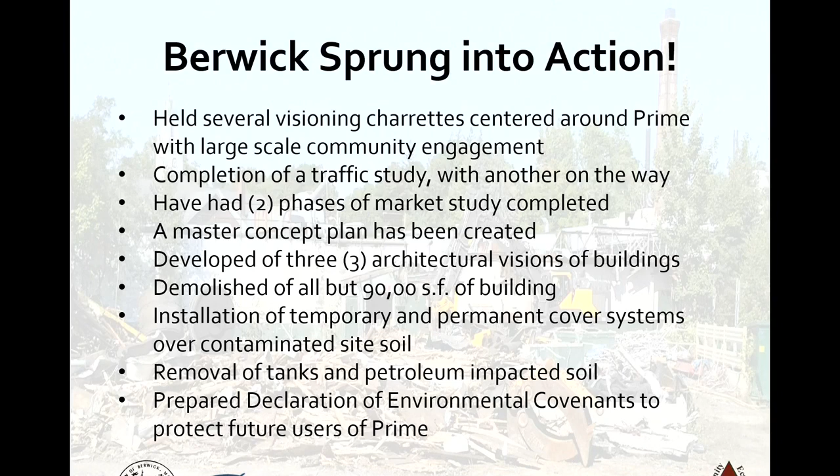In Berwick, we've held several visioning sessions and had large-scale community engagement. We've completed a traffic study, and we've got another traffic study underway where we're looking at every intersection downtown, and how we can get bike lanes in there and improve pedestrian traffic, but also have it all work together with the cars. We've also had a market study done.

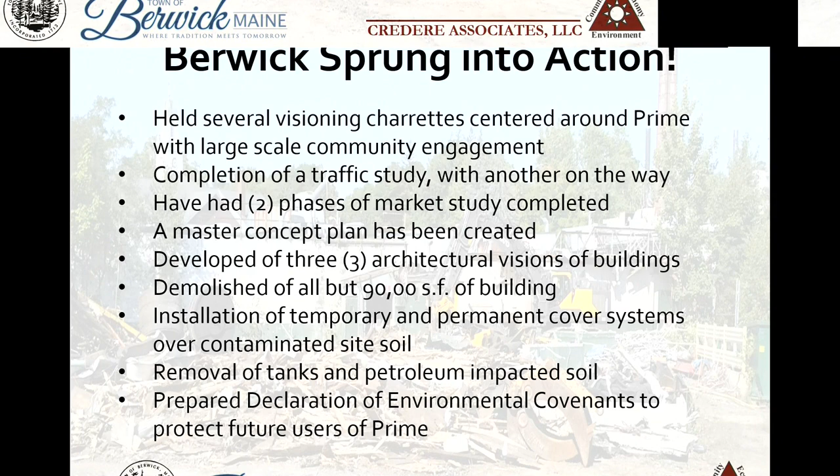You'll see that there's a master concept that's been created, with architectural renderings of the buildings. All but 90,000 square feet of buildings have been demolished, about 7 acres of contiguous buildings that at one point was 47 buildings put together. Yeah, and we are on our way.

We'll just give a little background. Samantha is going to run us through a lot of the update on the cleanup that's been executed over the last several years. But I think James hit the nail on the head, that there's so much incredible momentum going on in Berwick, and a lot of it ties back to, first and foremost, the hard work of a number of volunteers in town. James recognized a lot of them, but there's a lot that still should be named too, because day in and day out, meeting in and meeting out, they've shown up and been part of the momentum, been part of what's going on. And you can tie a lot of the interest in developing our downtown to this important 11 acres across the street, of which we're about to update you on, about 8 of which will transfer to the future developer, the Funds of Jupiter or 20 Sullivan Street, whatever he wants to call himself.

This will transfer, and this will hopefully be the next step in the journey for this property, which leads to economic development. I live in Berwick, so I'm a Berwick community member. I'm also the chair of the Ad Hoc Recreation Committee, and I'm on Envision Berwick. I work at Credere Associates, and we did a lot of work on this. Previous to working for Credere Associates, I worked for Weston and Sampson, and we did the demolition design to help Credere Associates with the demo on this property. At Credere, with all the efforts of Rip Patton to try to help find leveraged funds and do grant writing, all this work has been tremendous. And then we have people at Credere like Sam who have been the heart and soul of what's been going on, the people that tirelessly go out and just execute the project.

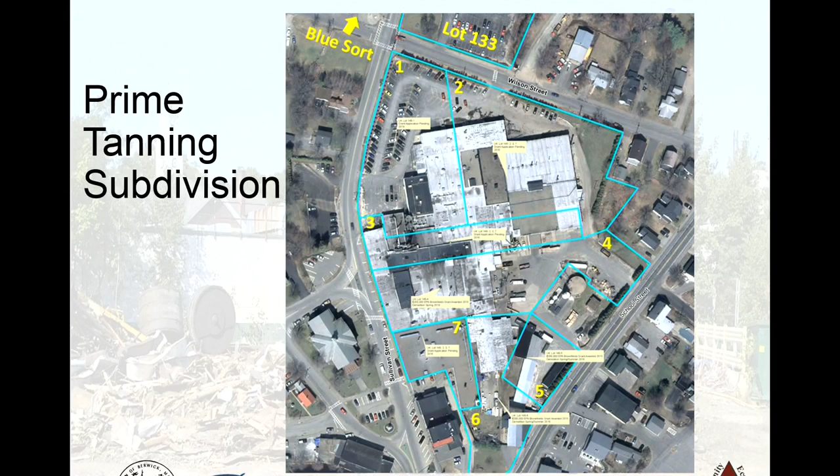All right, so this is an aerial view of Prime Tanning. The lot was subdivided into 7 different lots, and you can see the town hall. Is this a laser pointer here? No? I'll be your pointer then. Okay, thank you, my arm cannot reach.

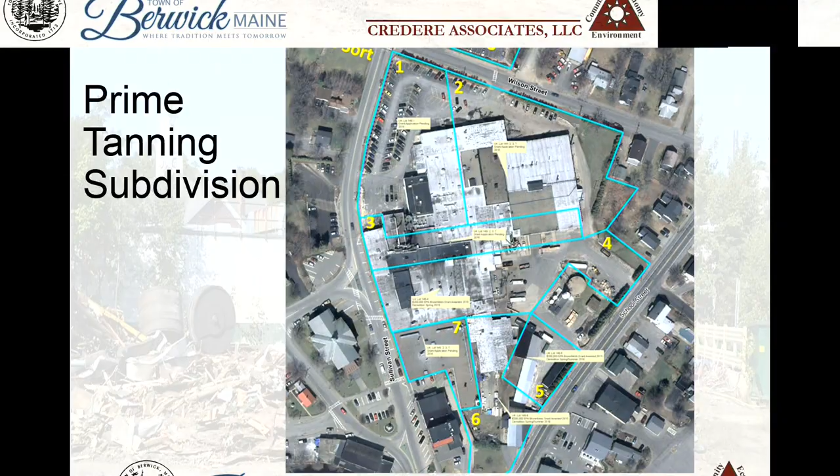So just to give you an idea of where we are, the town hall is right over there where Rick's pointing. And so the pre-treatment plant was also included in the first phase of our work, which is located on the other side. Thank you, Rick.

So it's important to note that this was completed in 2 phases. The first phase was lots 4, 5, and 6, and then the second phase was lots 1, 2, 3, and 7. And we're in the works for the blue sort lot, which is just off the map, and lot 133. Rick's going to talk to you about that later on. So based on how we obtained funding and whatnot is why we addressed lots 4, 5, and 6 initially, and then moved on to lots 1, 2, 3, and 7.

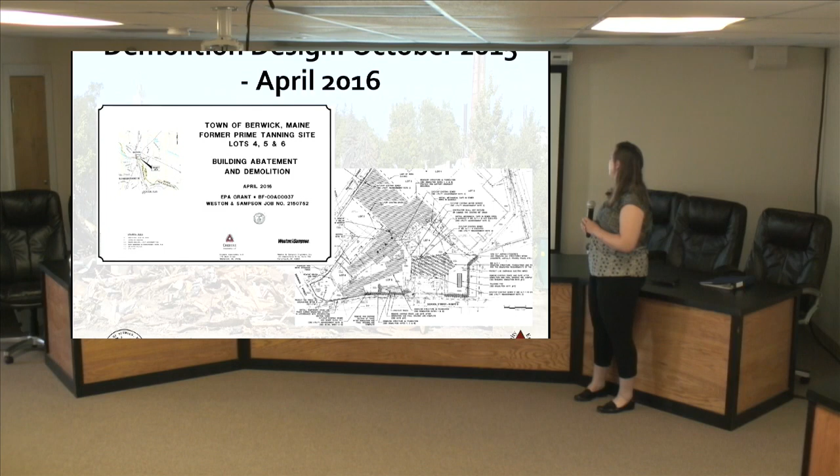The demolition design, which Weston and Sampson helped with, spanned from October 2015 to April 2016. Weston and Sampson prepared the bid specs as well. We also got great input from Frank Underwood of Envision Berwick, who mentioned keeping some of the sewer infrastructure for future redevelopment.

After we finished with the demolition design, we moved on to demolishing the buildings. For lots 4, 5, and 6, all of the buildings were demolished, and for lots 1, 2, 3, and 7, only select buildings were demolished.

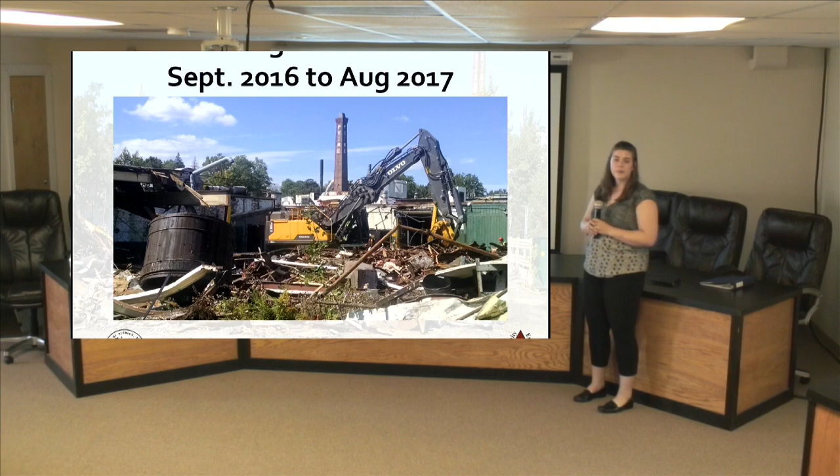This picture is of the beginning stages. You can see the color wheel in the corner there. The town has kept 2 of those larger color wheels, and there are 5 more smaller ones located in one of the buildings currently on the site. The color wheels represent the craftsmanship of the prime tanning operations. They were constructed at the site, so the town felt it was important to preserve some of those.

They're really cool. You look in them and they're all these exotic woods, and they are really pieces of art. The long-term dyeing on the inside has really colored them very interestingly. To incorporate them into some future element of the redevelopment, I think we've already got people who have come through and talked about that. So trying to not forget the past.

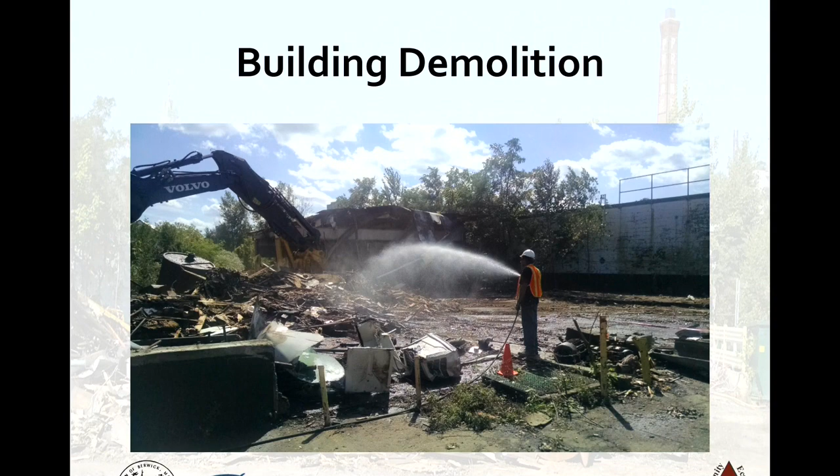This is another picture of the demolition activities. It was really important that EnviroVantage prevent dust from migrating off of the site. So there was constantly a person keeping the demolition debris wet while they were doing their activities, so there was minimal dust. I think we had zero complaints, right, James and Steve? No complaints on the dust, which was really good. For a big project, that's pretty good.

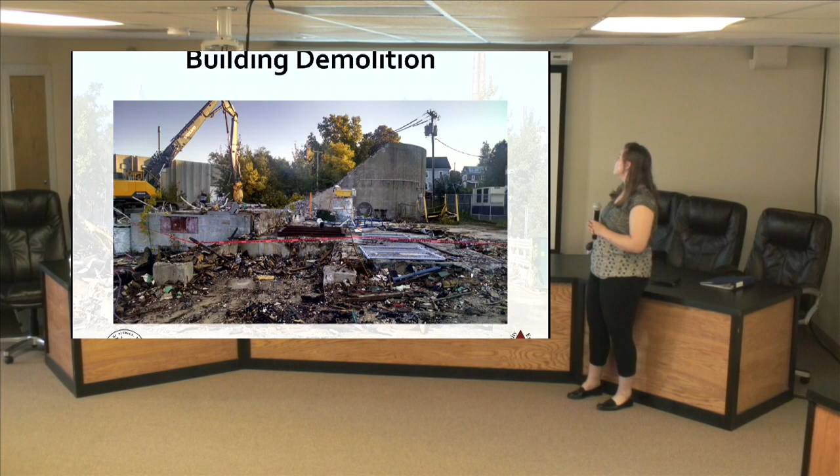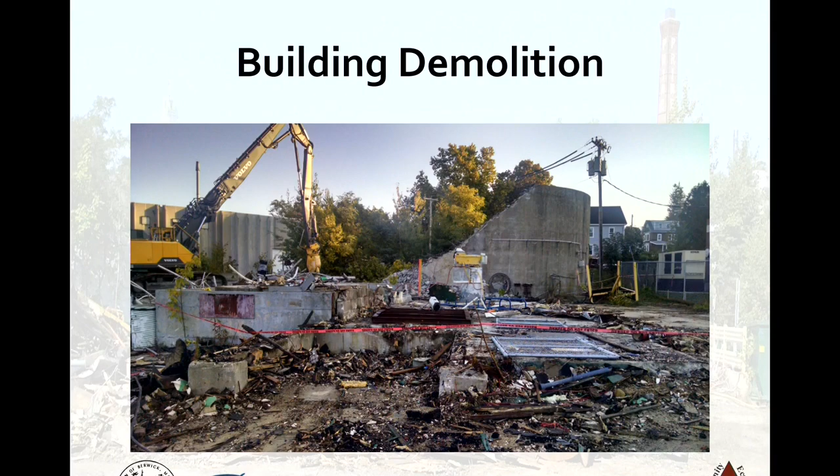This is a shot of the demolition of the pretreatment plant. This portion was performed concurrently with the demolition of lots 4, 5, and 6, but it was funded privately through Funds of Jupiter, as he is going to use this in the future with his redevelopment, but it wasn't part of our Brownfields funding. Here's a great example of leveraging, where we had an opportunity to remediate this site at the same time while the other lots were going on. It was much easier for EnviroVantage, and the cost came down for Funds of Jupiter to pay for that because this equipment was already on site. So it was really a good time.

This is another shot of the pretreatment plant demolition, but this is the powdered lime tank. It's just a pretty interesting shot.

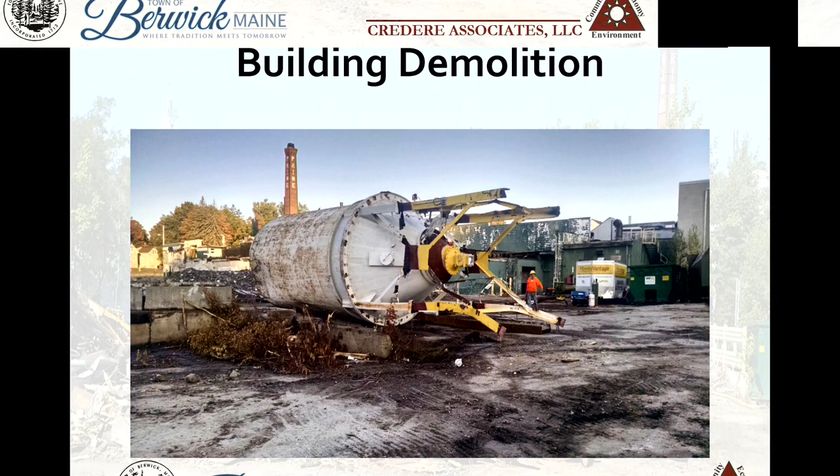Next we have this, viewing into the alcove. You can see there's still some building slab there, which is no longer there. This alcove was gutted and is now regraded.

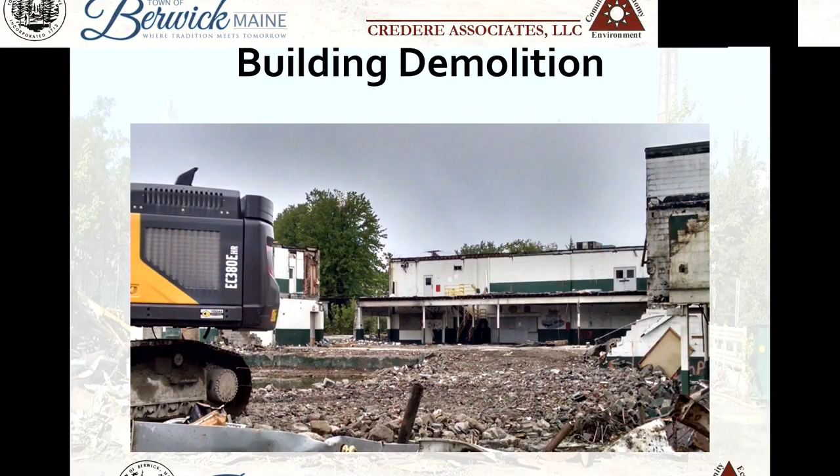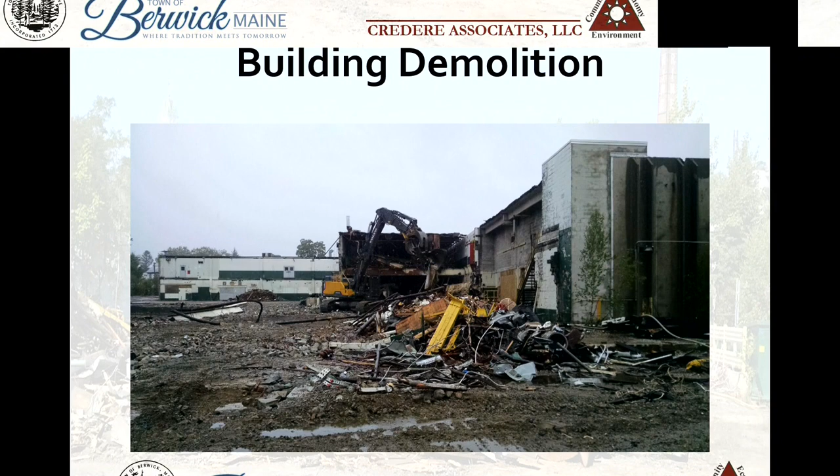This is part of the demolition on lots 1, 2, and 3, and these are the buildings that remain now. This next shot is showing more of the buildings that remain. EnviroVantage performed a structural evaluation of the buildings that were to be demolished and the ones to remain, to make sure that the ones standing now were structurally safe, that the walls were pinned and attached securely.

The important thing about this is that as much as demo can seem monotonous, like you bring in a big ball or an excavator and you knock things over, this was a little bit challenging because Funds of Jupiter wanted to end up with some building to work with at the end.

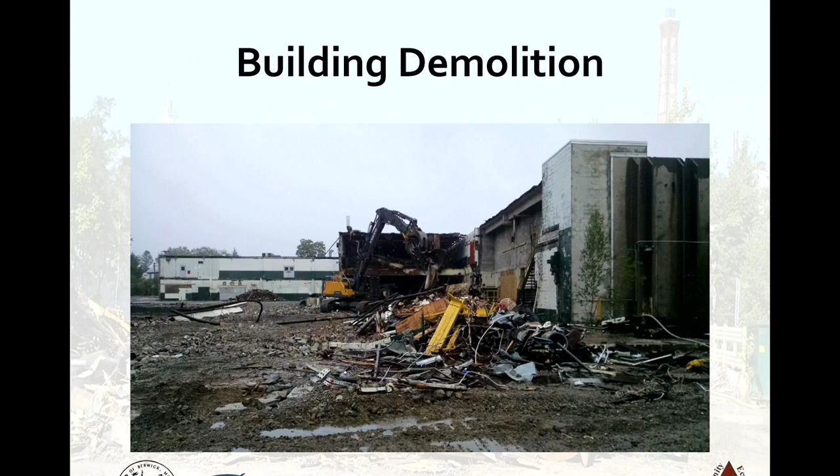The walls on the inside of the alcove, this wall you see here and this other wall they're working on, had to be structurally supported on the inside. Because those walls, and that wall, and another wall on building C, went with the buildings that were taken down, they needed to be pinned and are temporarily supported. The nice thing is they will be rebuilt in the future and will become something far better than what they look like now.

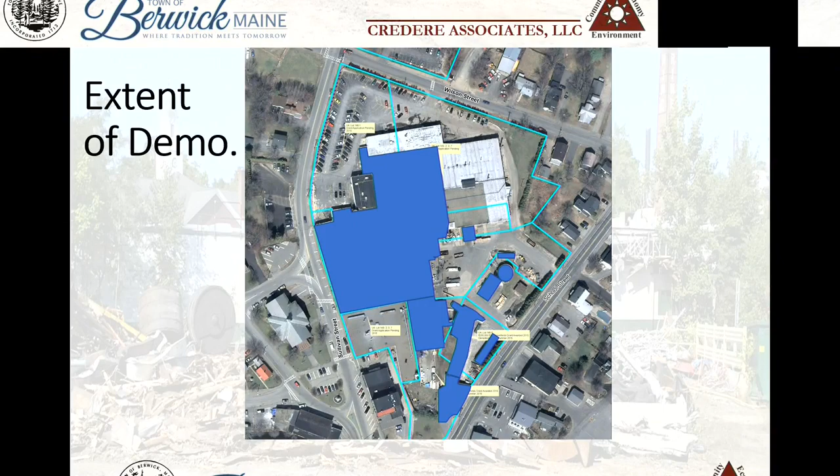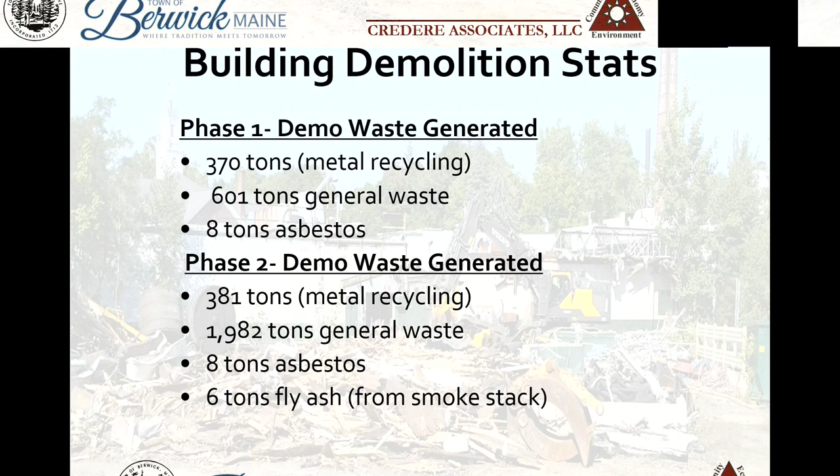So just a couple of facts for you regarding the demolition. There was almost 800 tons of metal recycling completed between the two phases. Then we had about 2,500 tons of general waste with 16 tons of asbestos waste. And when the stack came down, there was 6 tons of fly ash that we had to dispose of appropriately.

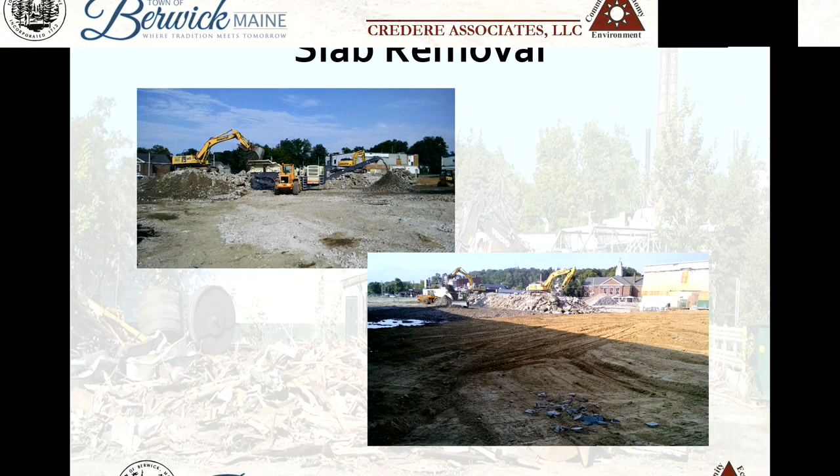After the buildings were removed, that's when we moved on to the slab removal. As part of our analysis of Brownfield's cleanup alternatives, we outlined taking those building foundation slabs, which were concrete, and grinding them up with other asphalt and brick debris from the buildings. That's what we used to make the temporary cover system that you see on the site now, that crushed up rubble, is all of those former building foundation slabs just crushed up.

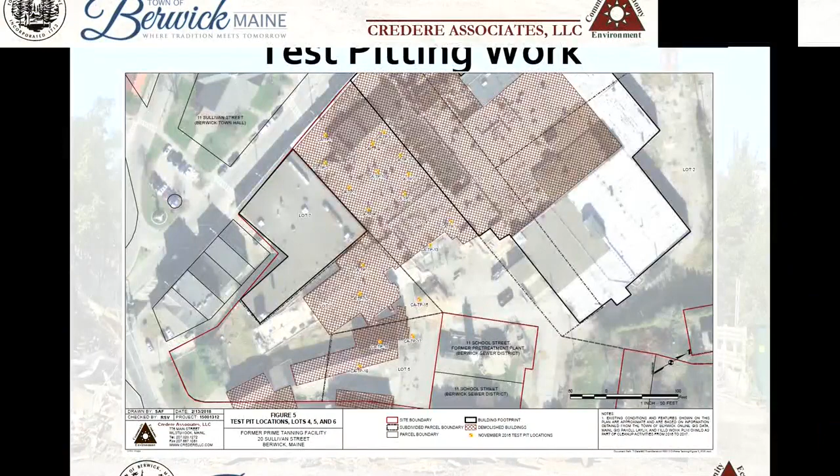Once the slabs were removed, that's when we moved on to our test pitting work to make sure there wasn't any subsurface contamination that needed to be removed. The hatched area is where we demoed, and the orange are the test pits on lots 4, 5, and 6. This figure shows the test pits on lots 1, 2, and 3. Lot 7 was basically all the L-shaped building, so not really anything happened on that lot since we didn't demo that building.

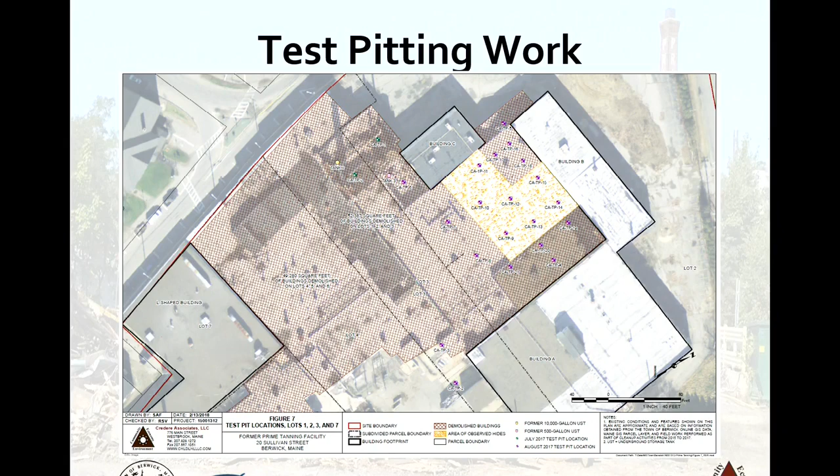What you see here is the white and orange, a layer of leather scraps and hides that we found, which were underneath the slab and were left in place because of the temporary cover system we have on the site now. There wasn't any, so according to the analysis of Brownfield's cleanup alternatives, we were going to remove oil-saturated soil, so this didn't fall under that. With our cover system, and since this is the proposed area of a parking lot, we left those in place.

These test pits were also designed, as we're doing them, to make sure there wasn't any other gross contamination present. We specifically wanted to cover what we call PAH contaminated soil, metals contamination. We wanted to make sure there wasn't any significant sources of VOCs or anything like that in the open areas that would eventually be covered.

So these are some images of test pitting work. You can see the high groundwater that we encountered during our work, which proved to be a bit of an issue at times. In the top right picture, you see some black oil in the groundwater. We'll talk about that a little bit later, so stay tuned.

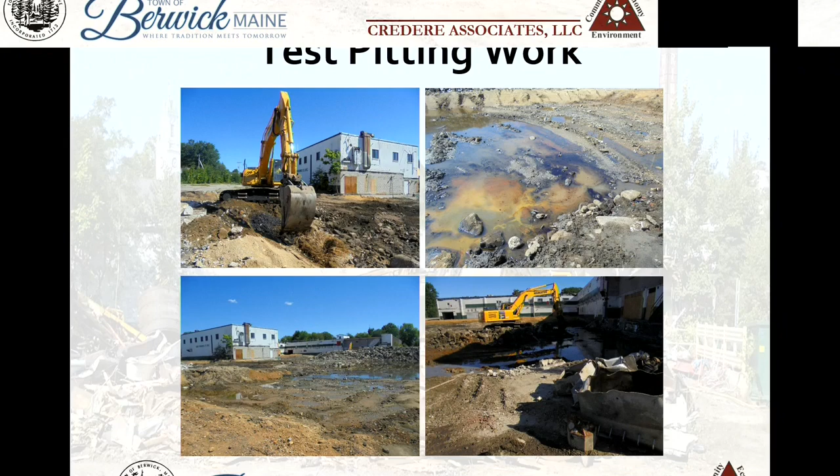So here's the stack demo. We have a little video we can show you of the stack coming down. If it goes fast, it was running slow a little while ago. Everybody watch the circle. Oh my God, that was actually fast.

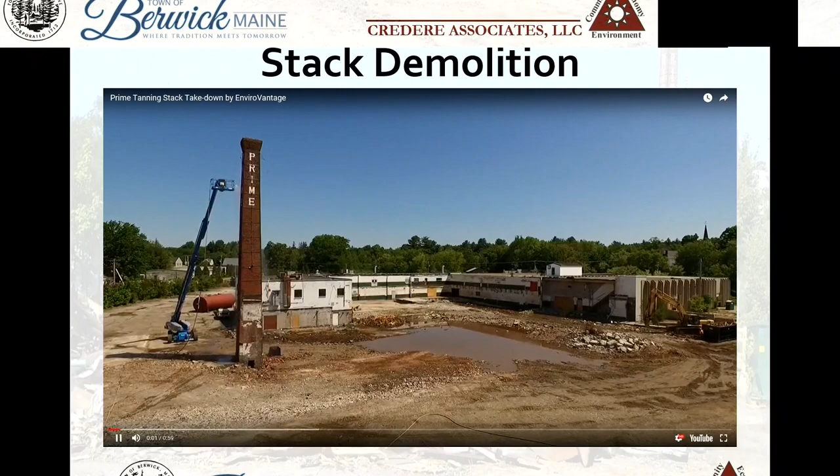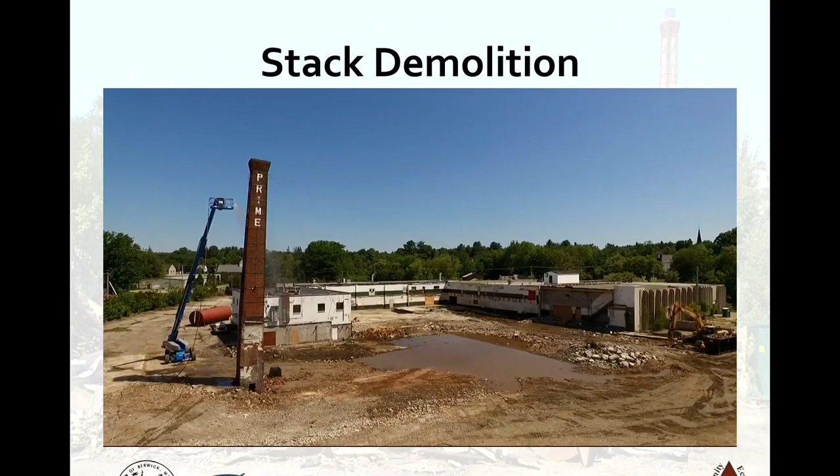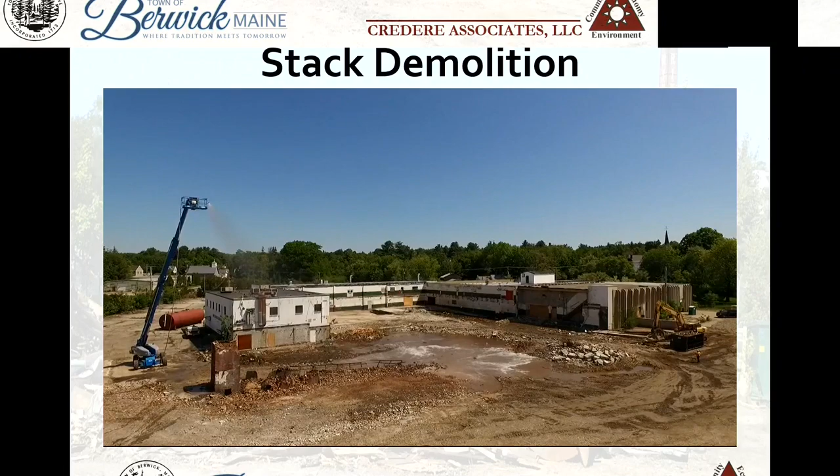There's one on the other side, and you can see the superstructure that was part of the stack left behind, almost a skeleton. The town sent some trucks over once this came down, and they took bricks to another part of the site where they were sorted and cleaned.

James will talk about it, but you see some engraved bricks. These bricks will be part of an engraving fundraiser that will happen.

$99.99. What? For $99.99, I'm in.

So after we demoed the buildings and took out the building slabs, we constructed this temporary cover system area, which is that crushed concrete, asphalt, and brick material. There's also a permanent cover system area, the green space you see down at the edge.

It's a DEP approved permanent cover system, so the town can use that as they want. It's a marker layer, like garden fabric, with 8 inches of clean compacted fill, and then 4 inches of loam on top of that.

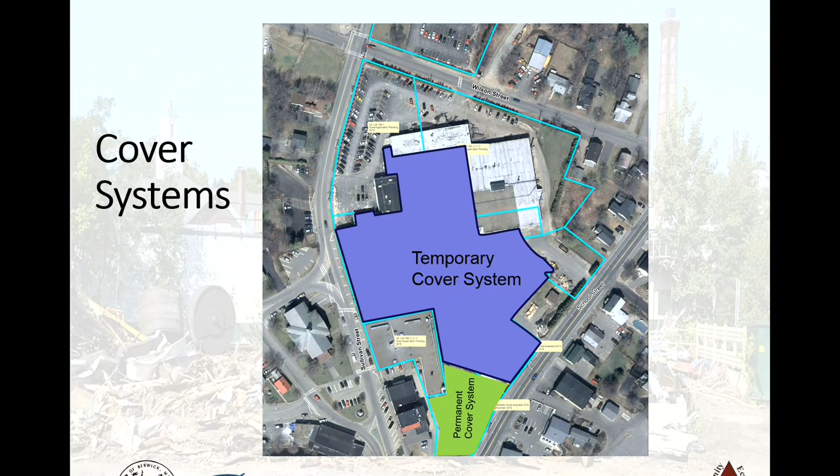Seed. Weed seed. So is the town retaining that green piece? Ultimately we can add to that later, but hopefully the future holds the town will get more than this.

When you see the concept, the green space that extends by here is actually more robust than that. Ultimately the developer, Mark Ahaya, has indicated that he wants to give back to the town. Within certain stipulations, the town has decided they would be happy to accept that once the engineered cover system is completed on the rest of the temporary cover system.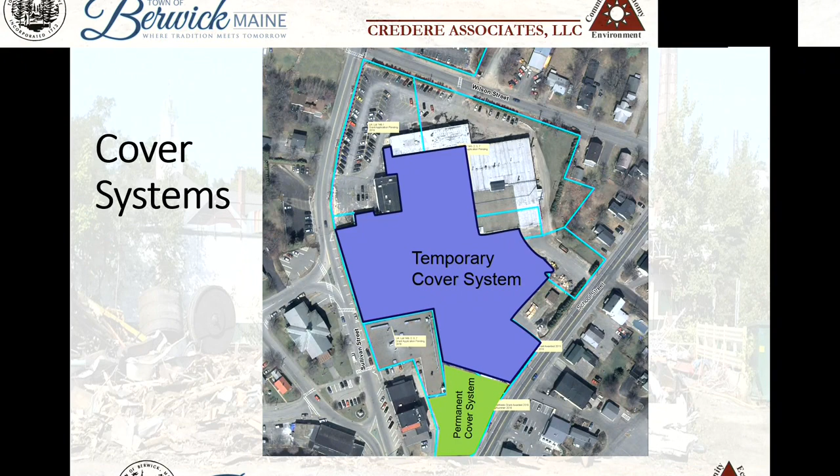The reason you see so much purple-blue is that the developer did not know, when this started, what the redevelopment would be. It wasn't prudent to put a permanent cover system over everything, because for DEP's purposes, when you cover things, some of that can be building foundation and some could be other hardscapes like sidewalks. Not knowing where those were going, we wanted to create a blank slate that the developer could imagine on.

You've got a parking lot, you've got all these other things.

So that low spot we saw earlier was regraded with the temporary cover system to provide nice even grades for redevelopment. And this is a picture of the permanent cover system green space.

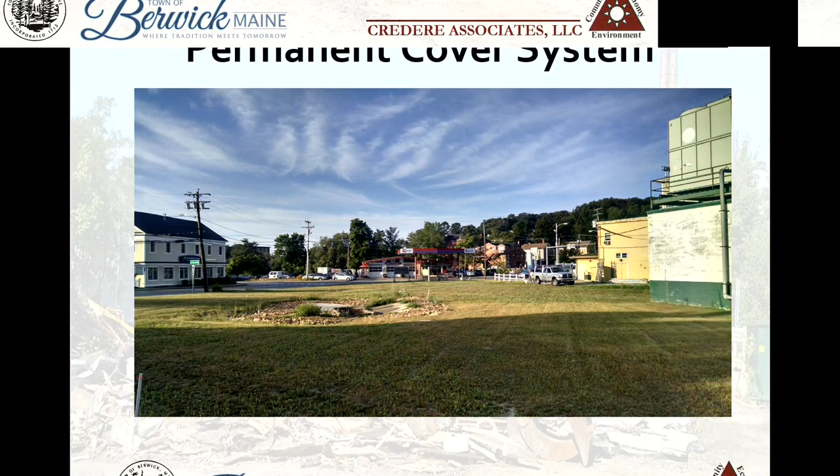So back to the oily water mentioned earlier. We discovered an underground storage tank in an area of soil that was saturated with what appeared to be number 6 fuel oil.

Based on our excavation of this material, it was located right underneath the boiler room where another above-ground storage tank that held number 6 fuel oil was located. So that whole combination just led to this release of oil to the subsurface.

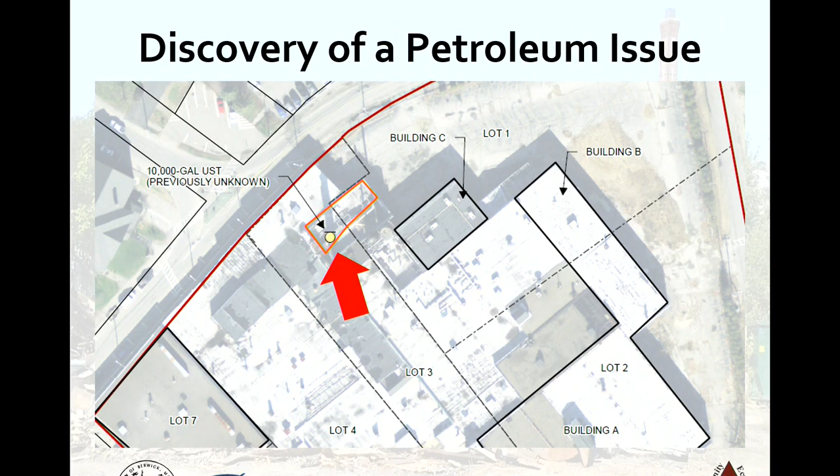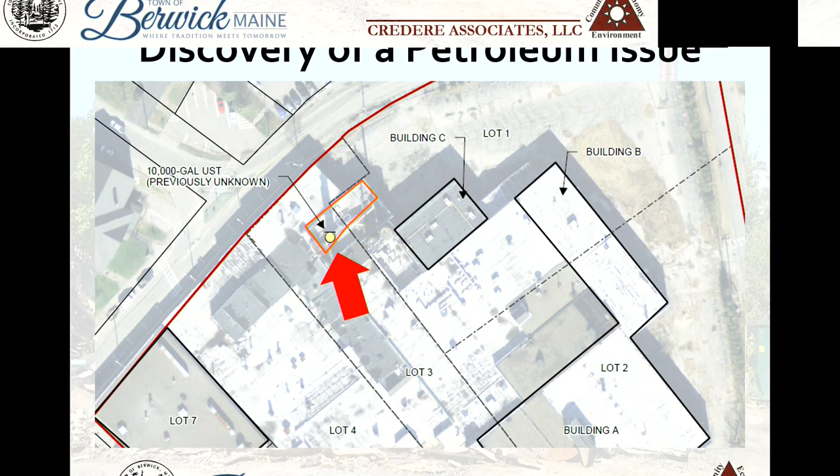He's keeping that because he's considering using that in some of the design potentially, painting it out and making it look like a funky tank. I don't know how it will work, but it's a vision that I don't have.

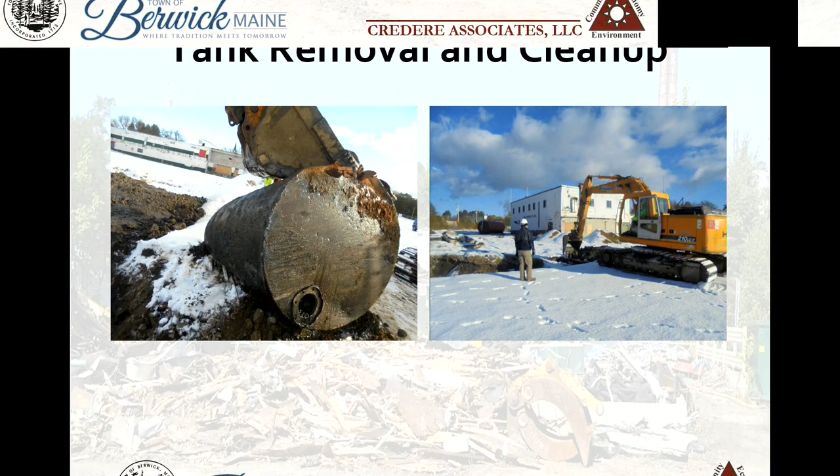These are some pictures of the tank removal. That's Rick right there, looking cold. The tank was actually pulled out in 3 pieces, so what you see there is just a third of it. It was a pretty big tank.

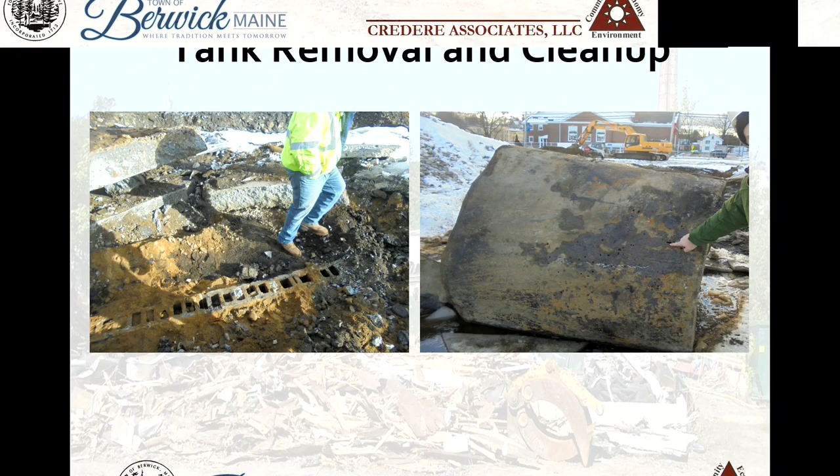You can see this is the middle section with a lot of corroded holes in it. It's just a thin, single-walled steel tank that we don't know when it was installed. You could bend this tank with your hand because it was so corroded.

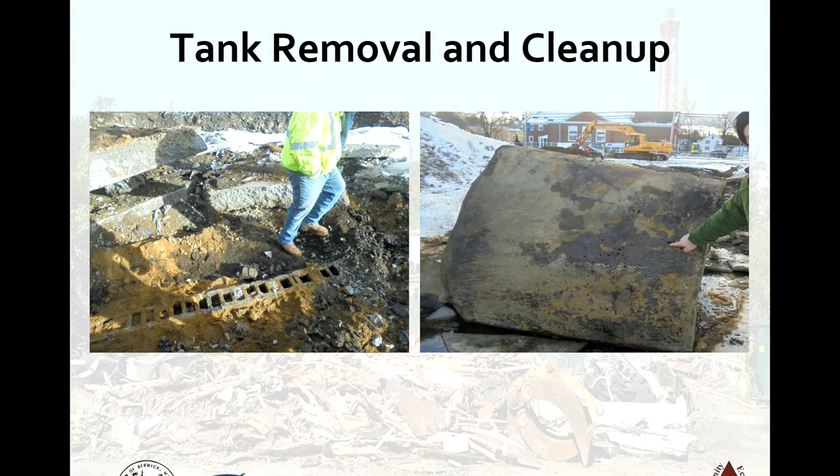You can see in the CMU block foundation walls that the number 6 oil had gotten trapped there as well - it was just these pools of oil. All of that was removed from the site, 230 tons total.

So the tank removal and oil saturated soil removal happened this past December. We worked on our report summarizing all of this in January and February and submitted a final version in March, where Maine DEP will provide an updated no action assurance letter for that. The idea here was to get the property closer to redevelopment with this cleanup.

There were 8 items in the original VRAP letter, things like manage soil properly, take care, do some additional characterization underneath things. We checked a number of the boxes when it came to the VRAP. Then, to help the developer along, Maine DEP has issued very recently, within the last couple of weeks, a draft revised letter basically telling the developer, make sure you do these other following things, and you can get your certificate of completion for that follow-on work.

DEP is also preparing a certificate of completion for the work that's been done. That'll be issued hopefully sometime this month—Ben just gave me the thumbs up, so that'll be issued this week, which is very good, Frank. We're getting a certificate of completion, which can now be counted as acres cleaned up, which is awesome.

That certificate of completion will have the final declaration of environmental covenant language, which gets recorded with the deed. It says that you have to manage soil properly, that any buildings that are continuously occupied need to demonstrate that you don't have any vapor concerns, and you can't extract groundwater without DEP's permission. Basically, that's what it says.

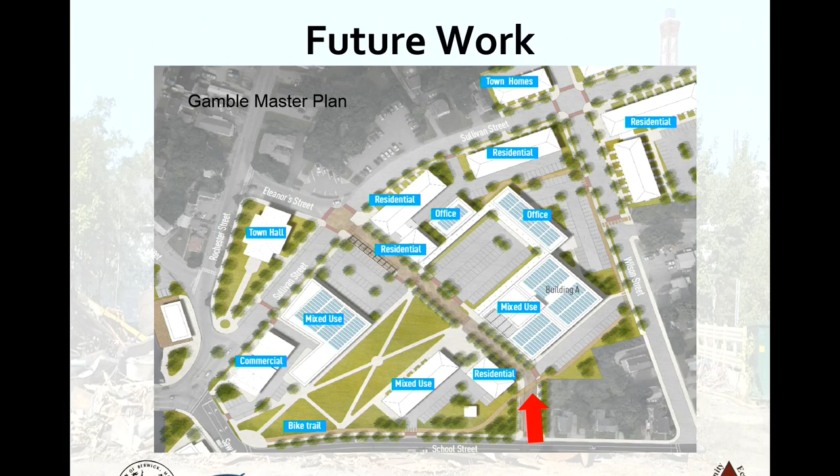So the entire site will become mixed use. Maybe a building or two will be mixed use in themselves, but the entire project will end up being mixed use. When you look on the edge on the right, you can see lot 133, and then just barely a portion of the blue sort lot, which I'll talk about.

Ultimately those will be residential, and the market study work we did demonstrated there's potential for about 200 units of market rate residential with some senior housing and some workforce housing. It's actually very exciting to see this much potential in this property.

They've also imagined another road that goes through the site, basically cutting the site in half, allowing for a bike trail and new parking areas. You can see the connection now made with the town hall, and you start to increase the fabric of the downtown.

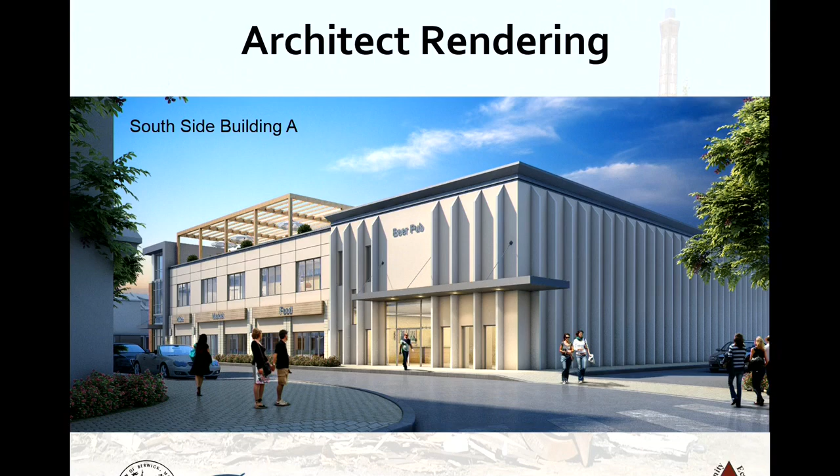brew pub and a small market. He's kind of fiddled with it—when you get out there and see the buildings, it's got this characteristic tilt-up concrete shape, and he's imagined putting some energy efficiency on the outside of it. Also, only two-thirds of that building on this side are structural, so you can take that off and put new building materials on there, and play with that in any shape or form and make it whatever you want. But this is one kind of rendition of that.

Forgot the most important part: outdoor music. I'm sorry, James. Yeah, outdoor music—very important to James.

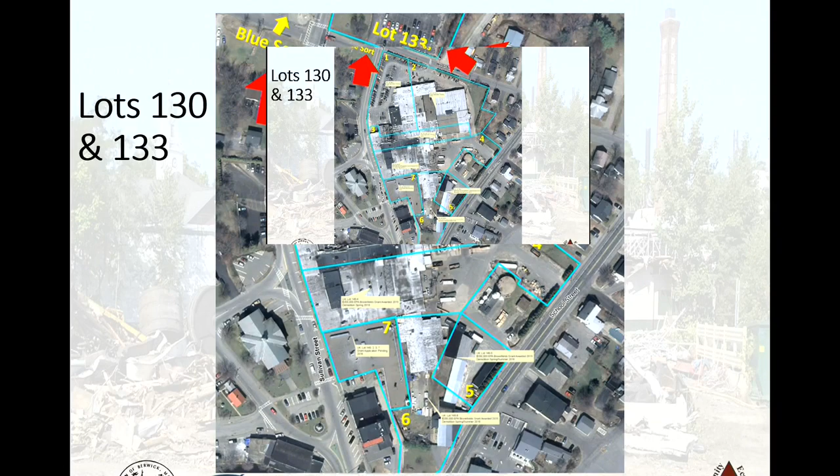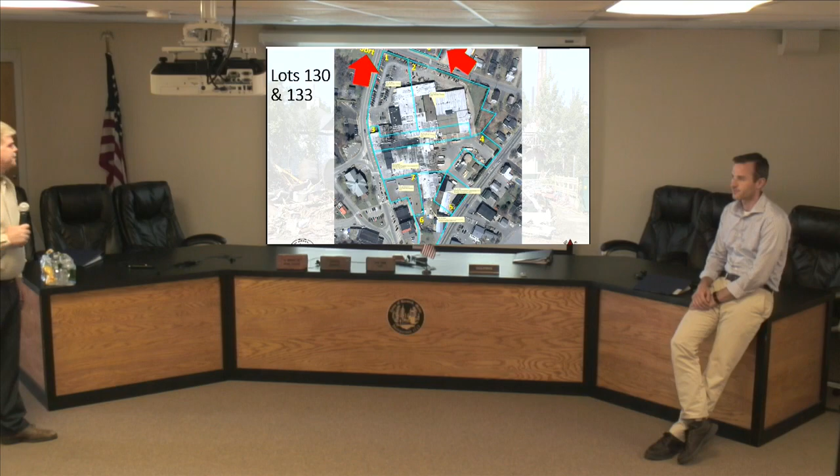So there's metals and PAH contamination, and you see some dots on this map showing previous exploration and work that's been done demonstrating polycyclic aromatic hydrocarbons and metals and a few other things—typical contaminants that are suitable for another covering system.

And so the idea here is to potentially try to create a clean lot on lot 130 of the Blue Sort building by relocating. We've talked to DEP in concept about this, about taking the contaminated soil, since it's all one site, and moving it onto lot 133.

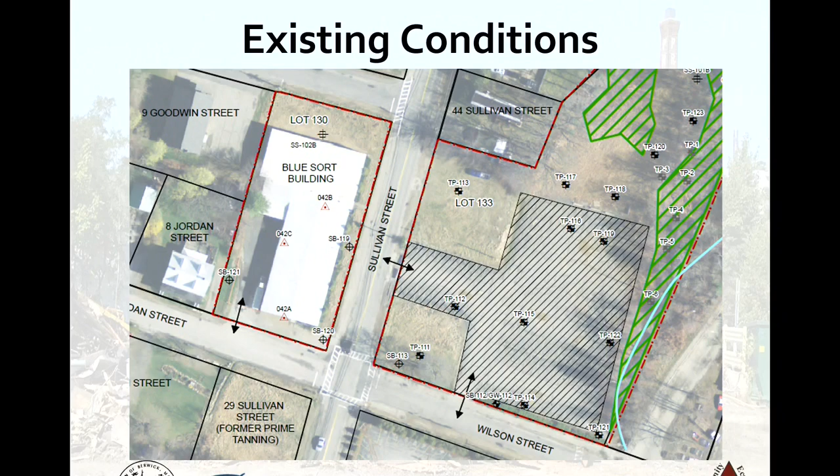Because when you go out there and see this, between Sullivan Street and this unnamed brook, there's 4 or 5, 6 feet of grade there. So we can actually bring material there and raise the grades. And it's much more cost effective for remediation to put these kinds of contaminants under a cover system.

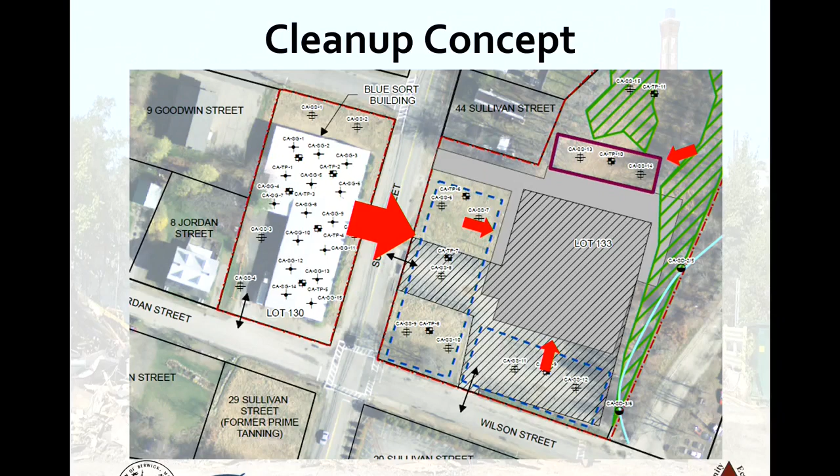Next slide. So what we would do is some more characterization work as part of the next step. We will evaluate underneath the building to see if there are any VOC sources, because one thing we learned from the other lots is that there were not only VOCs, but there were things under the building slabs that obviously needed to be addressed.

So what we've done is, you can see the blue dashes—those are the future layout of the buildings. We'll take the contaminated soil from lot 133, move it over underneath that parking lot, and also any extraneous soil contamination from the building foundation areas and other areas, and put them underneath that parking lot. In addition, the purple box will be an area outlined for the future home of another cover system.

So if you move contaminated soils and can't fit it, or you have more contamination that you discover when you do foundation holes here on lot 133, or if you do a foundation hole on the Prime lots and need a location for some contaminated soil, you can put it under the barrier system.

So that's kind of a nutshell. I know it's pretty quick, but that's kind of what we'll do when we go out there. I'd be happy to talk more about that.

Steve, do you want to mention anything about the transfer of the property, to give you guys an update on what's going on? You've heard that there's this entity, Funds of Jupiter, that wants to come in, and through the public-private partnership they're going to end up with the property. But really to detail when that will happen, Steve, please.

We had hoped that we would close and transfer the property either today or tomorrow. Mr. Cahaya could not be here for the length of time we needed to have him here. There was a slight disagreement about funding, exchanging back and forth, but he had very good, productive days. He was here. We've all agreed that we would do the closing on July 2nd.

So it's a couple of weeks away, but all of the paperwork has been done. All the deeds have been finished. Just waiting for the board to sign off on those on July 2nd. And he'll take ownership of just the large lot. The Blue Sort building and lot 133 will transfer once they're all cleaned up and ready to go.

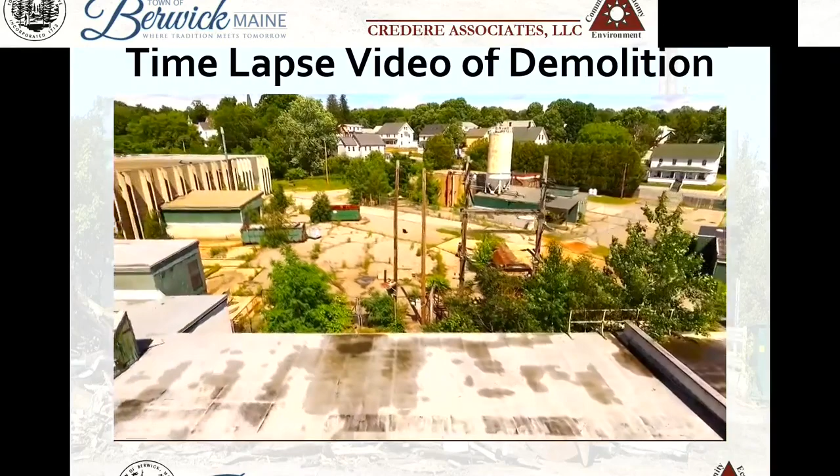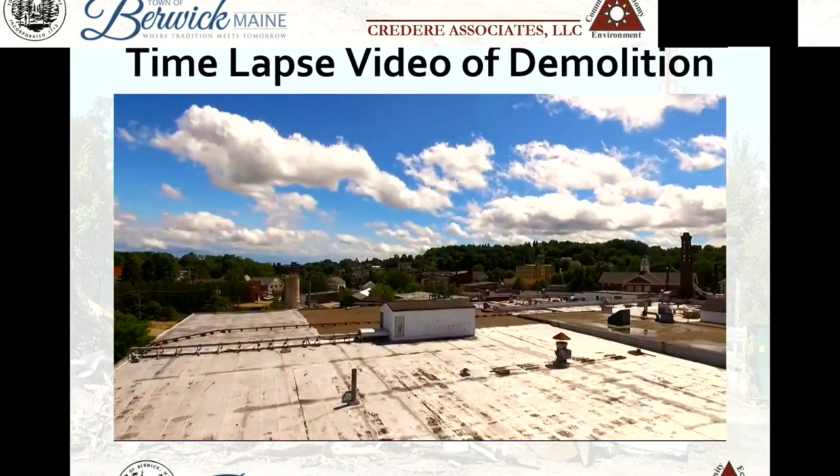We'll open the gate, and then we'll go into the temporary cover system and look at the site from a couple vantage points. I have some flashlights, so we can also go into the entryway of a couple of the buildings, so you can explore, because I know some of you haven't actually seen inside the buildings, and hopefully you can imagine what they'll become.

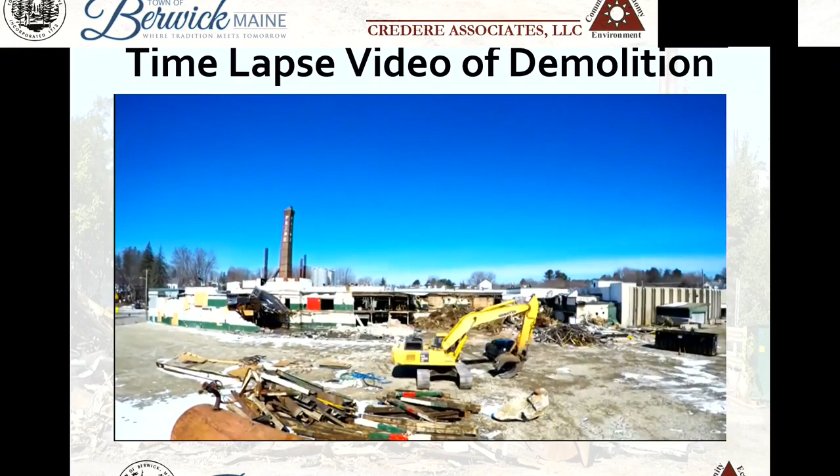But you need to be careful if you're going to walk around in there anywhere, because there's a lot of trip hazards. There's a lot of floor drains and stuff that were taken out of service by Credere Associates, but there's still a trip hazard.

So Rick or Steve, is 130 and 133, are they being transferred now or when they're done?

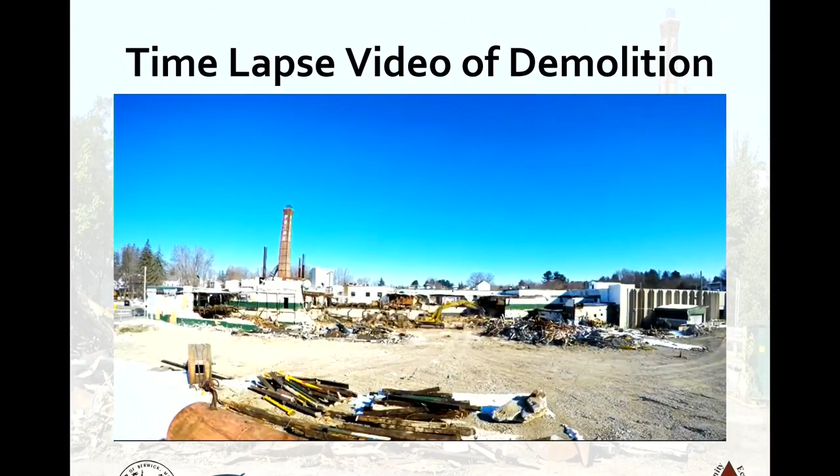When they're done, they have to be completed before we can transfer them. EPA will want us to expend all the money before we transfer the property.

Frank asked: Can they change order the work to Envirovantage? Because everybody was pleased with their performance on site.

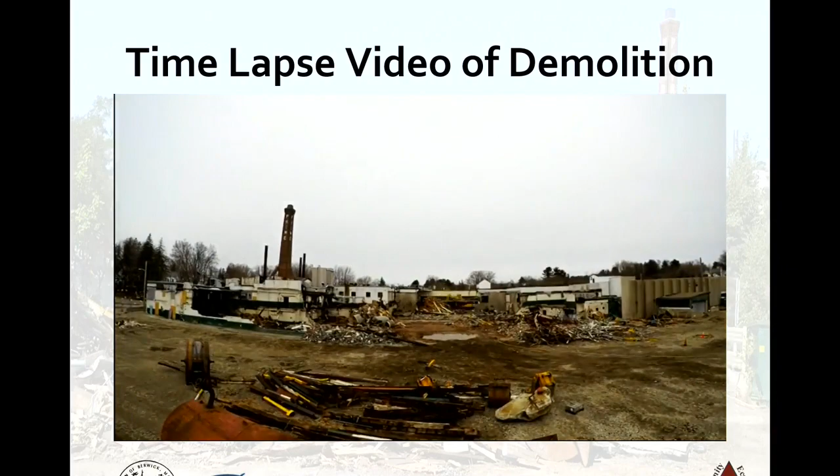We never heard anything in the public, but can the dollars—because they're 200,000, maybe there's a limit—can they be change ordered to Envirovantage? Not a question from me.

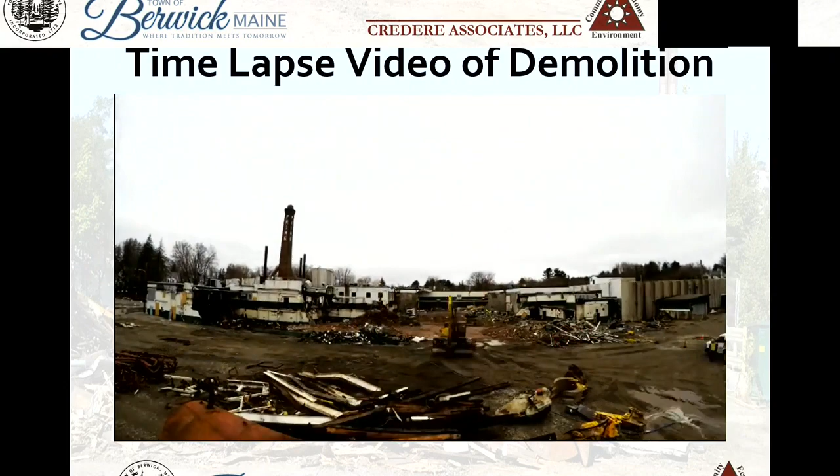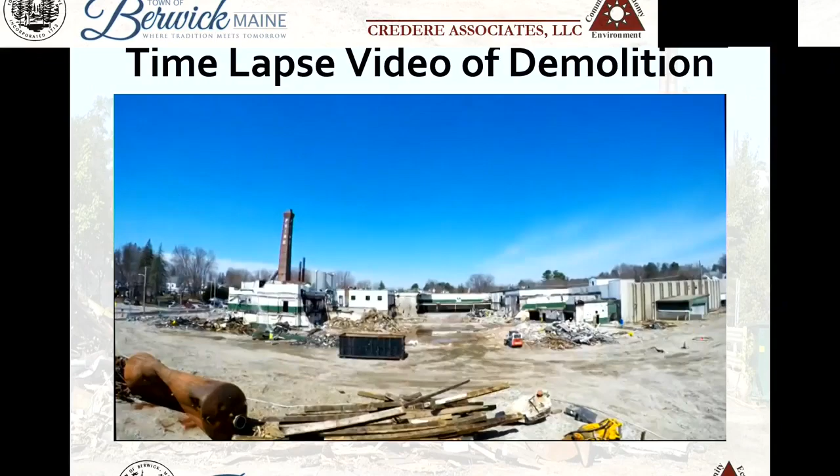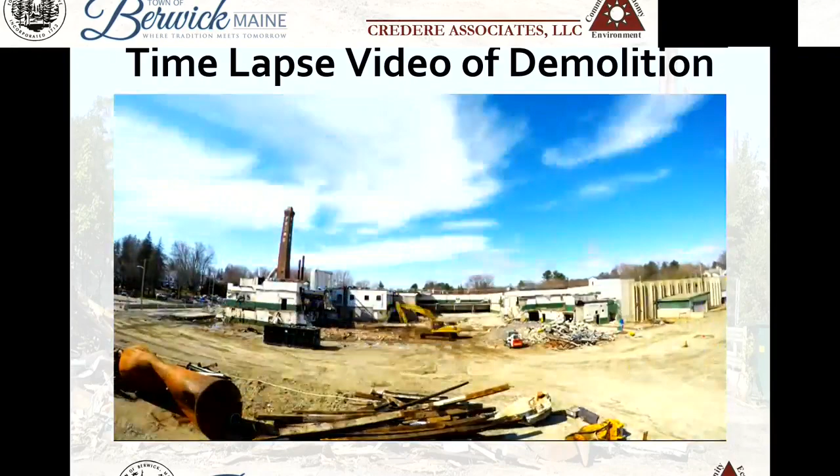I will tell you that while everybody was happy with the outcome of their work, I think with these two phases, because of what we're going to ask to do, we're going to remove contaminated soil. It's more of a dig project rather than a demo. There's certainly a little demo component with that 14,000 square foot building, but once you're done, I think there are local specialists that can really handle this, that we'd want to entertain bids from, and using the bidding process, our overall number for both lots will come down.

I'm just asking because maybe you could expedite something, since the bidding process can take up to 60 days. So we do have a little bit of time.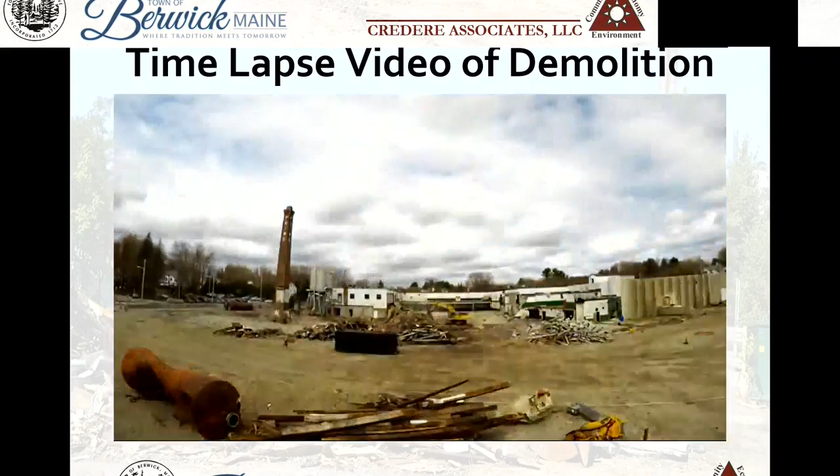All the grants we're going to be using will expire next September, so basically a year from this September, that money will not be available any longer. In talking with Mark, he feels like the best approach for timing will be to go out to bid in the late fall, giving flexibility to a contractor if we have a mild winter to do the work then, should they wish, or do it within the first couple of months of spring and be done, wrapped up, and reported. It does put a little pressure on the environmental professionals when we do it that way, because now we've got to get all our reporting done and have all the expenditures done. But we're sort of comfortable with that schedule at this point.

One more on lot 133: the history of that site—has it always been a parking lot use? There's been some storage there, and some other things. Actually, Sam could certainly speak to that—she's been doing some research on it.

Yeah, there was a garage area on the site as well as an office building. I believe the parking lot was paved in the late 70s. So after that was paved, the buildings were removed, and it's been that ever since.

I'm going to hand out the microphones to people, but for people who know me, I'm Tom Wright, been a resident of Berwick all my life.

Is the Blue Salt building—I know there's been some questions about how contaminated that has been. That originally started, Prime didn't put that building up. That was a hardware and lumber store that went out of business, and Prime bought it afterwards and used it mostly for storage. So my hope is that there's not going to be a lot of contaminants underneath the slab there. Just put that out there for people to chew on.